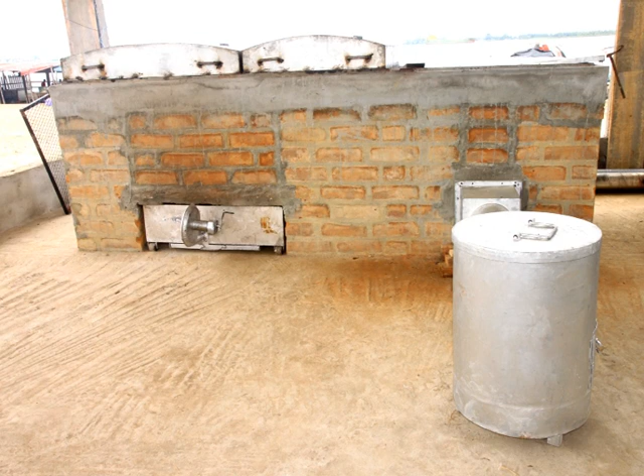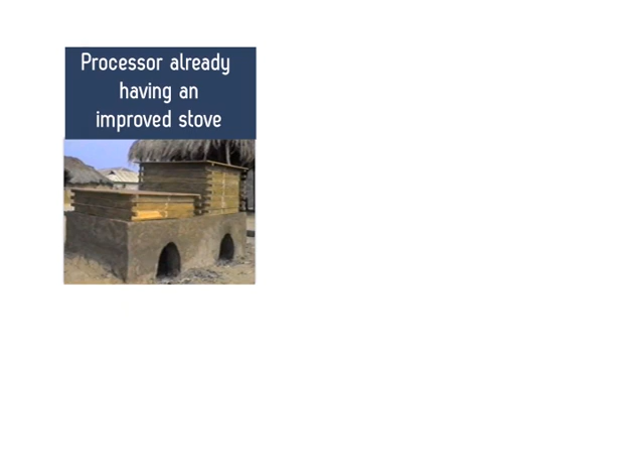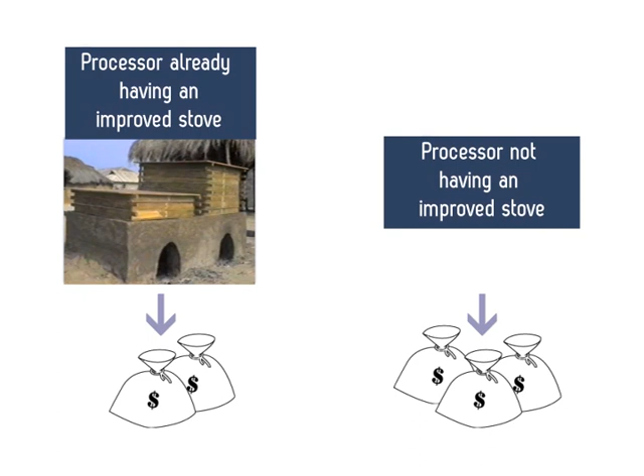The FTT-Thiaroye devices needed by an operator will depend on whether he or she wants to smoke, dry, or practice both, and also on whether or not he or she already has an improved stove on which the FTT-Thiaroye parts will be fitted. Therefore, the resources required will differ from one case to another, with the final objective of benefiting from better work conditions, placing on the market better quality products, and the possibility of additional revenue through the use of byproducts.

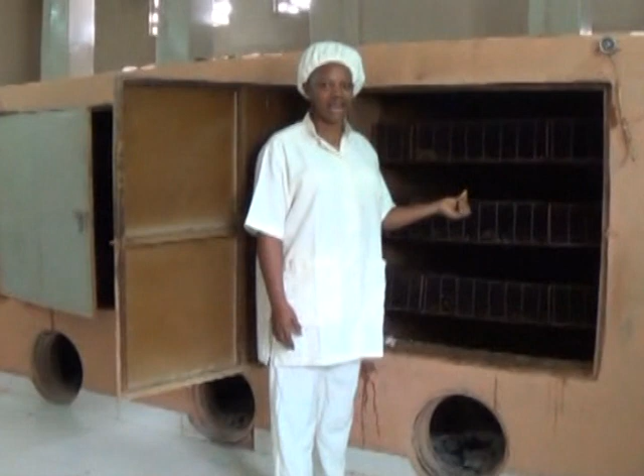In any case, the FTT-Thiaroye equipment must be seen within a framework of a compliant processing unit or plant, which implies an adequate engineering and technical design of the facilities to harbor the equipment.

The frame, racks, and lids are the same for the 2 types of equipment, be it the FTT-Thiaroye or existing improved kilns. This video will not describe how to make these parts given the number of training materials produced in the last decades by development agencies, including FAO, on the chorkor kiln and on the double compartment cinder block kiln made from brick cement, clay, or handled mud.

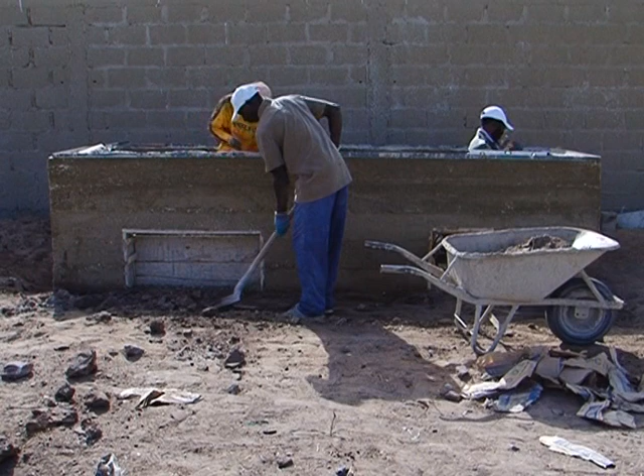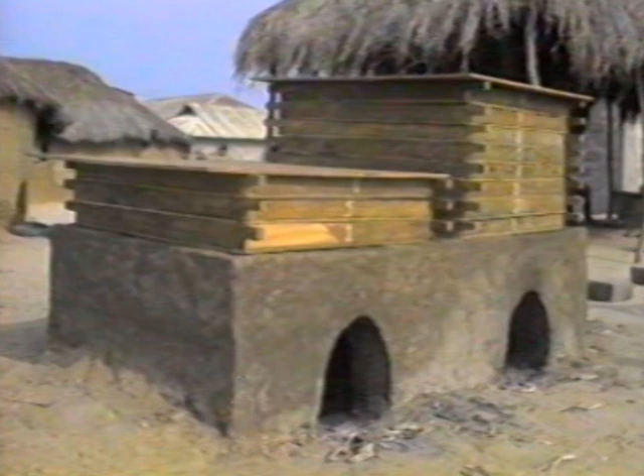However, a detailed description will be made of the vibrated kiln as it has a longer lifetime and requires less maintenance. Building the vibrated kiln. The decision as to what type of vibrated kiln will be used, whether a chorkor, cinder block, or double compartment Altona, will depend on usage practices and social acceptance.

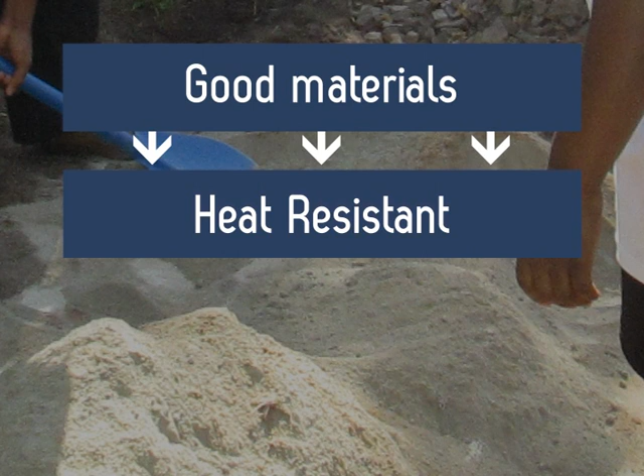As when building any kiln, a suitable, well-leveled plot of land is required with a minimum size of at least 5 square meters. It should not be prone to flooding and any source of contamination and pollution. Good materials should be chosen in order to be very resistant to heat. For example, we recommend well-vibrated reinforced concrete with a high concentration of cement. Ideally, the walls will be made very compact by using the appropriate machine.

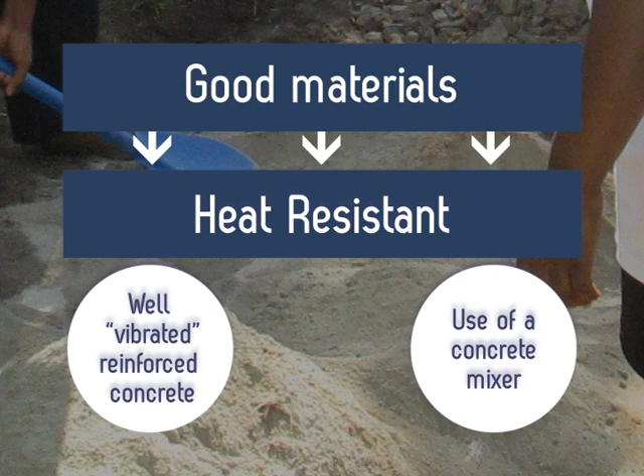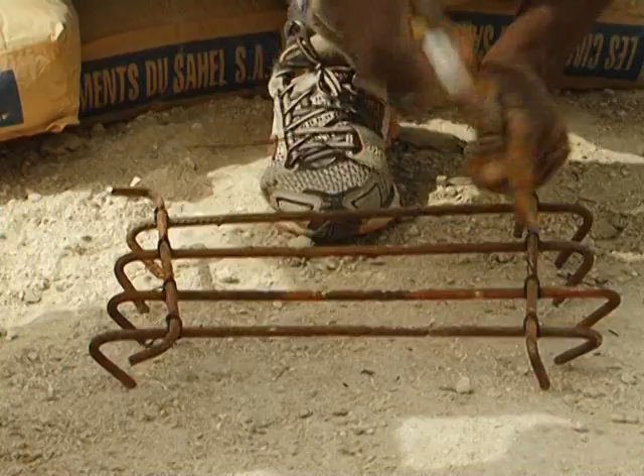Building stages for the double compartment vibrated kiln are as follows. Dig a 20 cm trench and case it with wooden planks. Then position iron bars inside the trench. Cast the foundation with a mixture of 2 cement bags, 2 wheelbarrows of sand, and 2 wheelbarrows of gravel. After a day, the foundation is stripped from its casing.

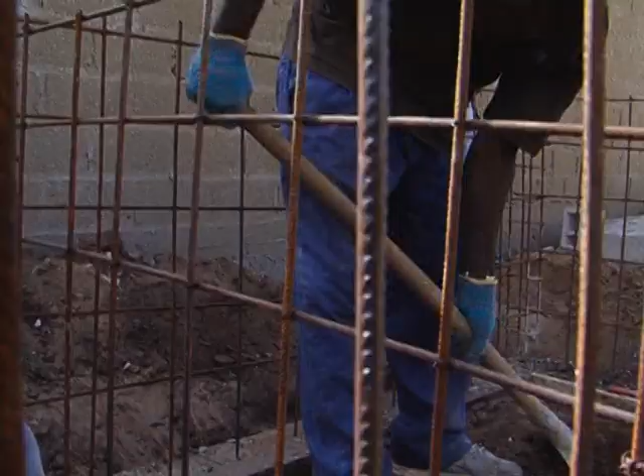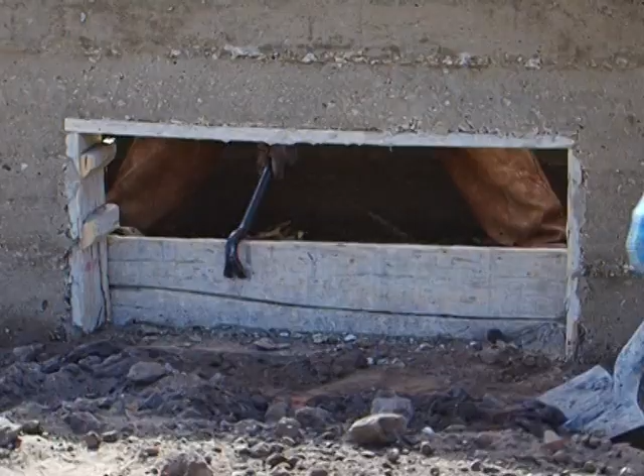The set of walls and the compartment's partition are cased and covered with iron of 6 mm diameter and cast with cement, sand, gravel mixture. The lintel at the gates and the chaining to the upper part are well evidenced. A 7 cm output ledge coming from the walls is cast at 20 cm from the chaining of the upper part.

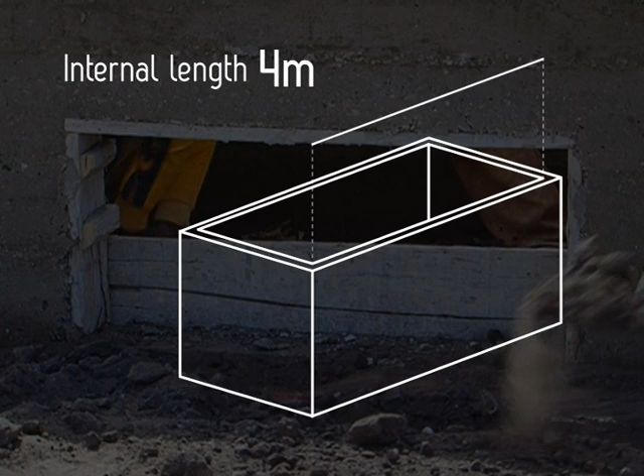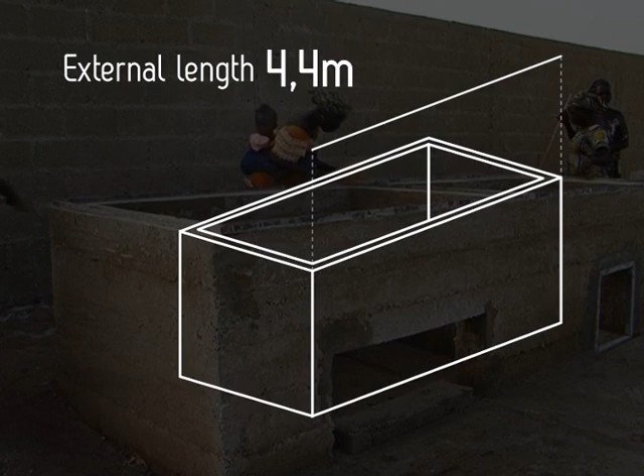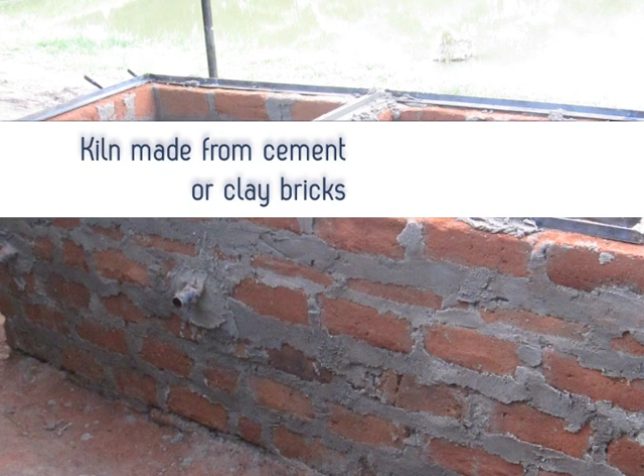For the prototype, the dimensions used were 1 meter for the height, 4 meters for the internal length, and 1 meter for the internal width. As for the external length and width, they are respectively 4.4 meters and 1.4 meters. The double compartment vibrated kiln cost about $800 with an estimated lifetime of at least 15 to 20 years. A kiln made from cement or clay bricks costs about $600 and has a lifespan of about 10 years.

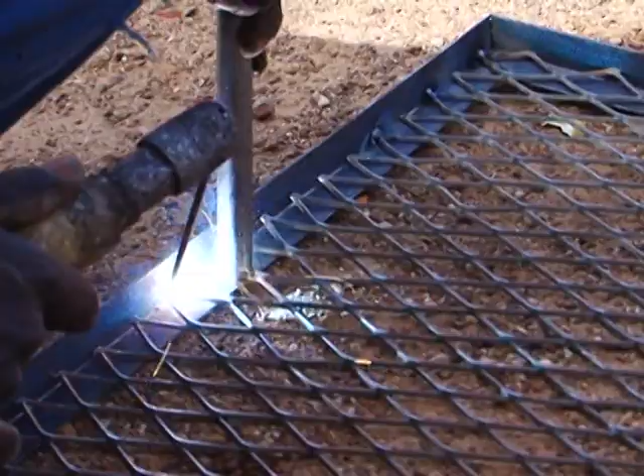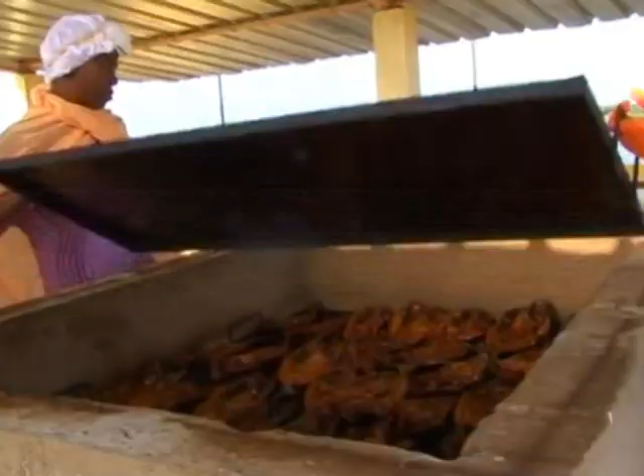Smoking or drying racks. As noted previously, their design is common to those of existing kilns. However, it is worth mentioning that materials should be chosen carefully for easy cleaning and heat resistance. The maximum load per rack for the cinder block is 100 kg against 20 kg for the chorkor. Practical advice would be not to exceed 10 stacked racks.

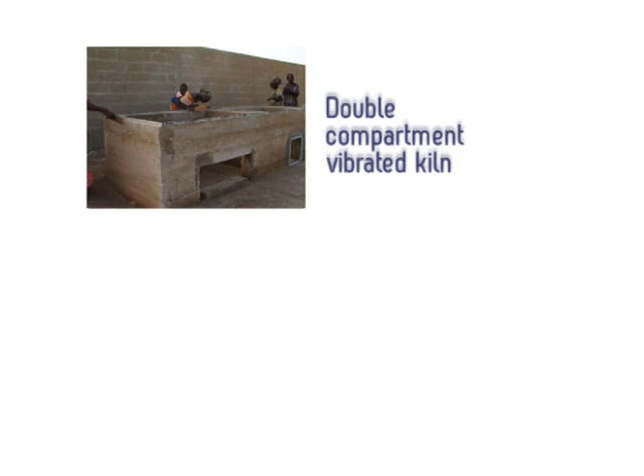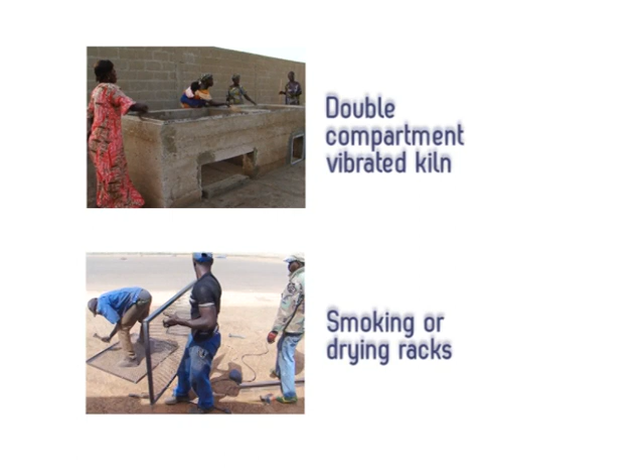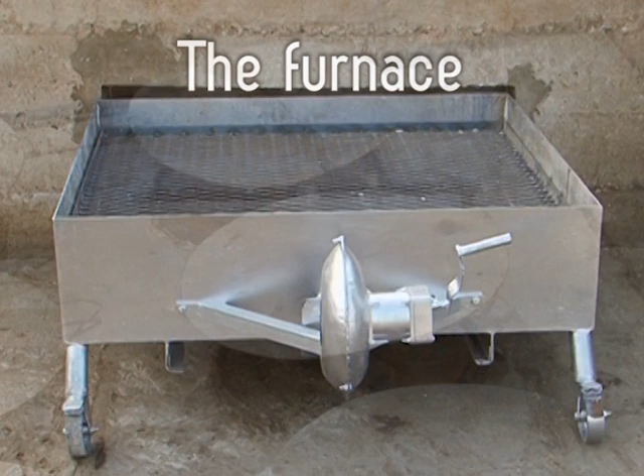The processor who has this equipment, kiln plus racks, will then need to get the relevant accessories to benefit from all the functions the FTT-Thiaroye offers. Accessories specific to the FTT-Thiaroye. First accessory, the furnace. Second accessory, the fat collection tray. Third accessory, the external smoke generator.

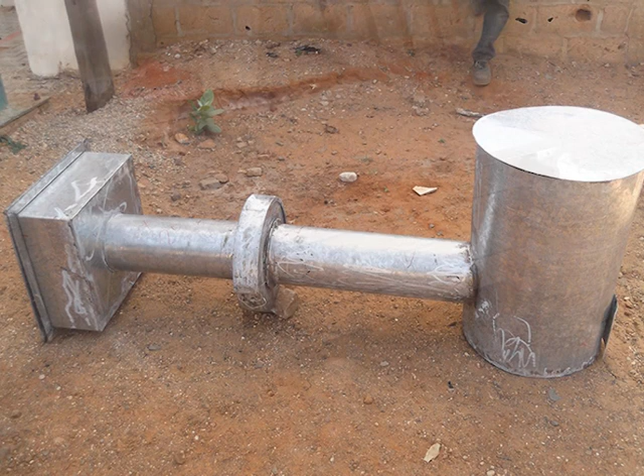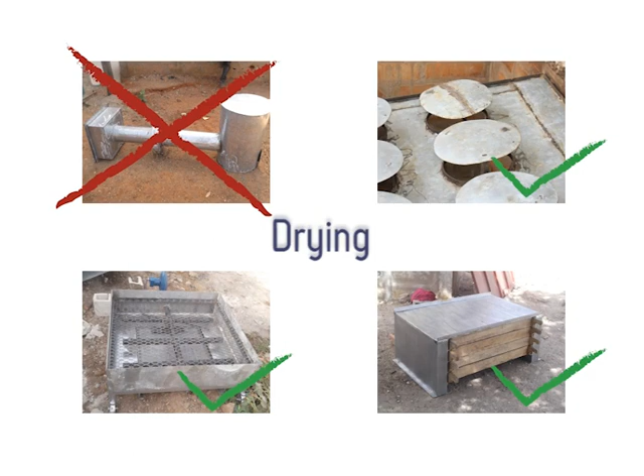Fourth accessory, the hot air distributor. For drying and storage of dried or smoked fish, the same accessories as those described above will be needed, without an external smoke generator. Apart from the kiln frame, all of the FTT-Thiaroye equipment, which is mostly made of steel, can be made by blacksmiths or any metal worker.

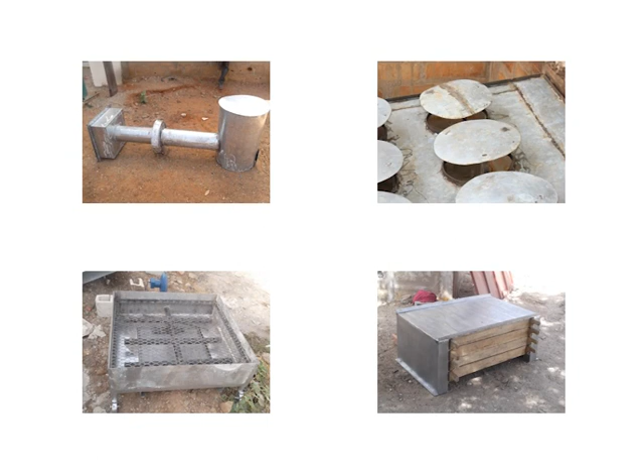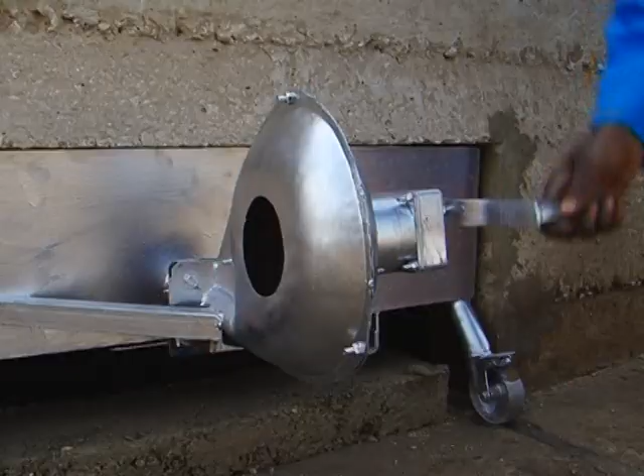Reviewing in detail the description and manufacturing of each of these FTT-Thiaroye accessories. First, the ember furnace. It will hold the fuel used to cook the fish. Loading it in the fireplace concentrates the heat on the product instead of having external leakages that might otherwise affect the operator during smoking. This feature also reduces fuel consumption.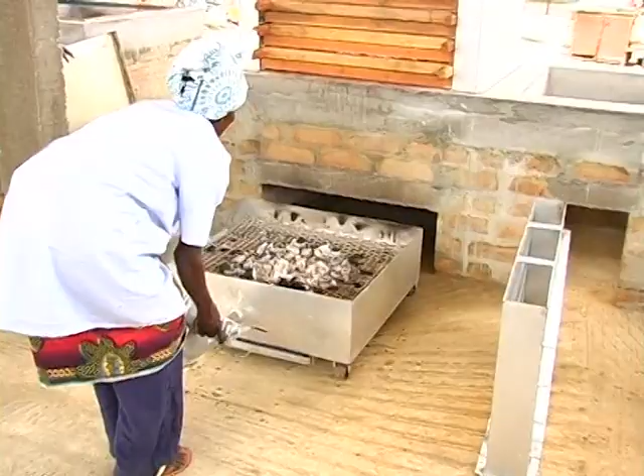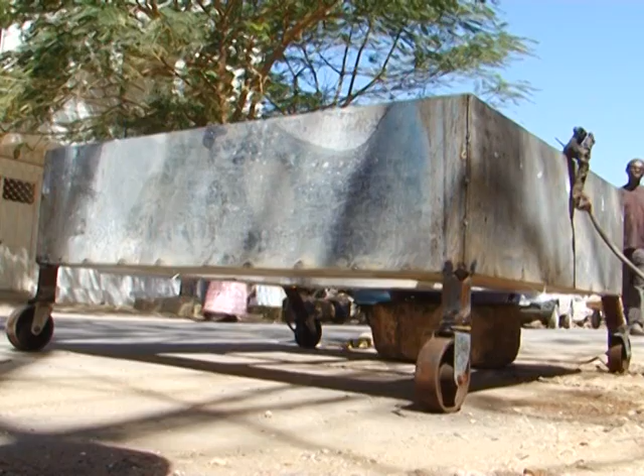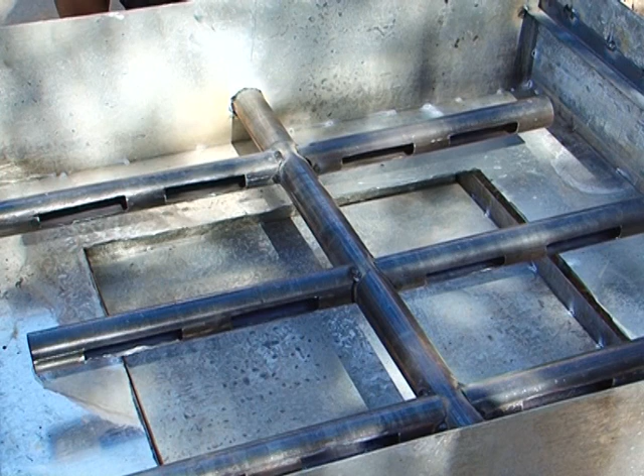The furnace should fit the dimensions of the kiln's gate and consists mainly of a 24 to 26 centimeter high and 1 meter wide metal box. It is equipped with 4 wheels to facilitate its movement towards the opening of the kiln. Cut perforated iron tubes are welded to the casing and serve as ventilation air pipes.

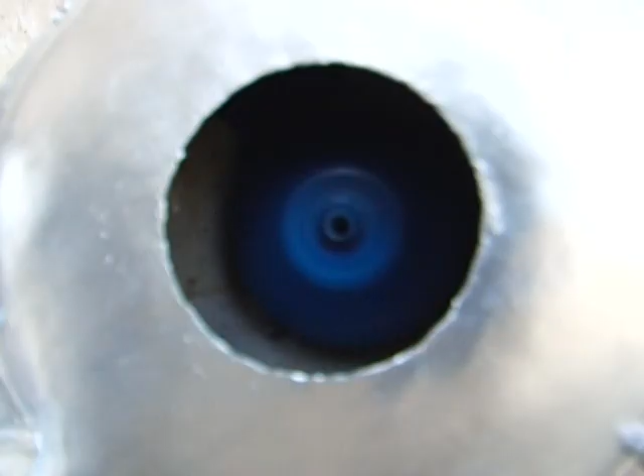A removable ash pan, a wire mesh to carry the embers, a forge to kindle the fire and send the hot air inside the kiln. The furnace costs about $200 with an estimated 5-year lifespan.

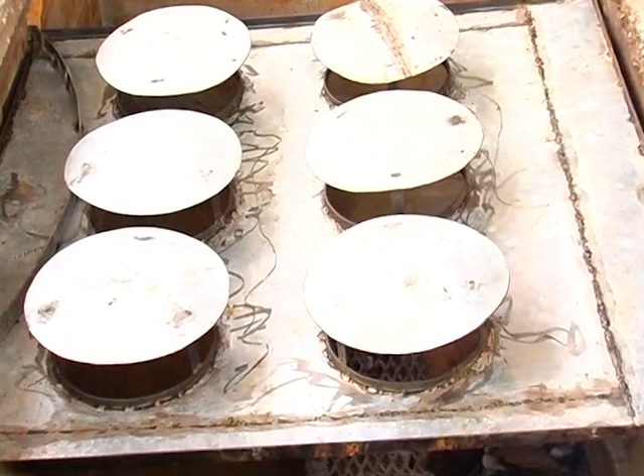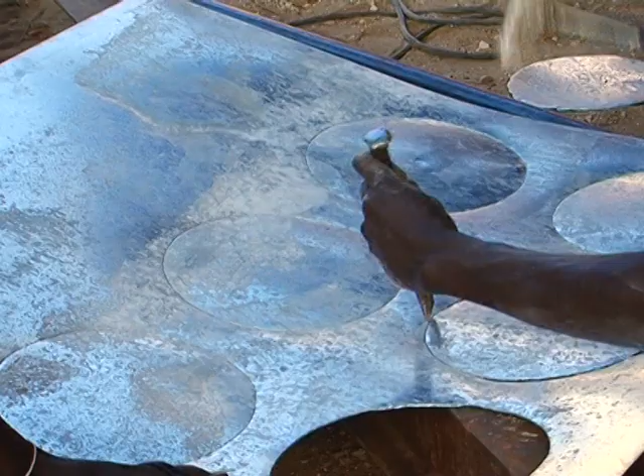The second accessory is the fat collection tray. As its name suggests, this is a system for collecting fat while cooking the fish. It includes a set of holes, each topped with a cone-shaped cap. The holes allow the heat from the stove to reach the fish on the rack, and the cone-shaped cap allows the fat to exudate, to drip on the tray instead of falling into the fire and causing a tar deposit on the product.

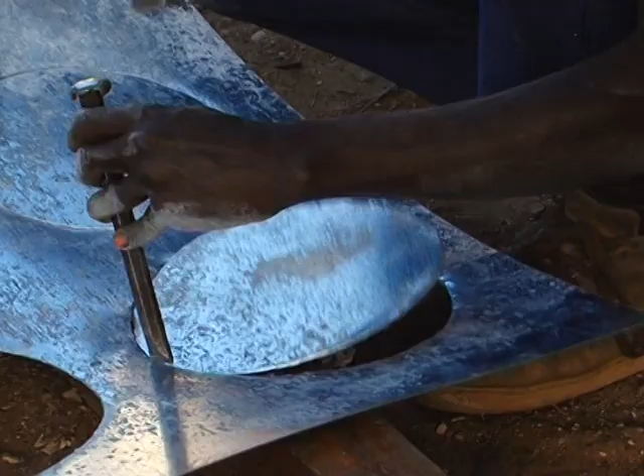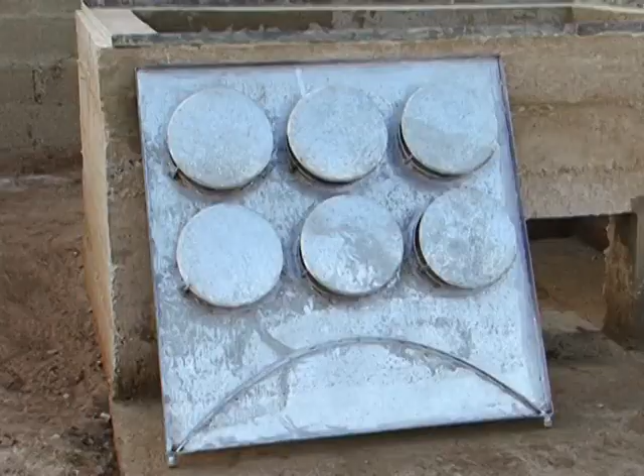The size of the fat collection tray is variable. However, it should fit the furnace in which it should be placed. The one used during the trial was 1 meter long, 1 meter wide, with 10 centimeter wide holes. A short, thin metal rod, topped by a cap, is disposed on the circumference of each hole. The fat collection tray is slightly tilted and placed 5 centimeters below the rack with fish. The average cost to manufacture the grease collection system is $100, with an estimated lifetime of a minimum of 5 years.

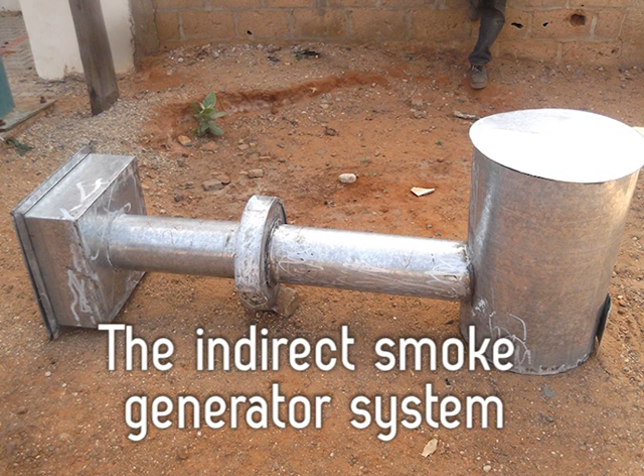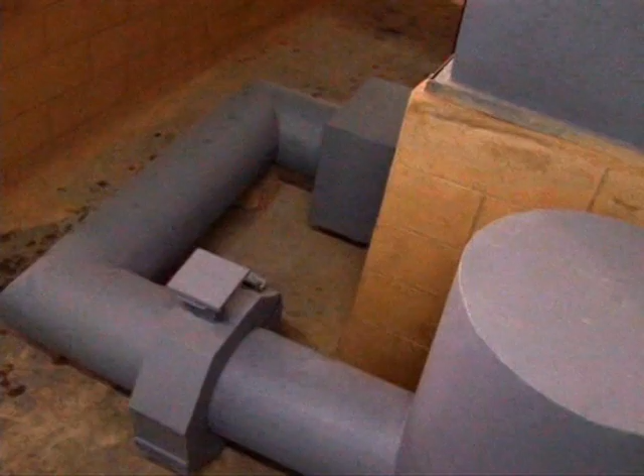The third accessory is the indirect smoke generator system. It is made up of a metal barrel fused to a metal tube that is roughly 1.5 meters long and 30 centimeters in diameter. The metal tube can be shaped into a spiral or into a circular tube depending on the available space. There also is a housing for the filter. This external generator can also be made from a water tank that is no longer used.

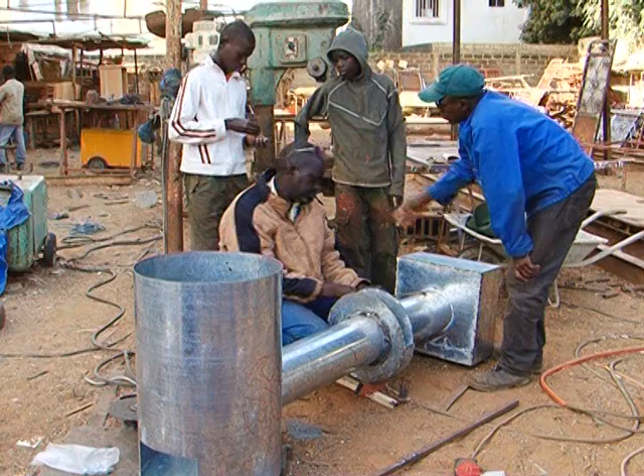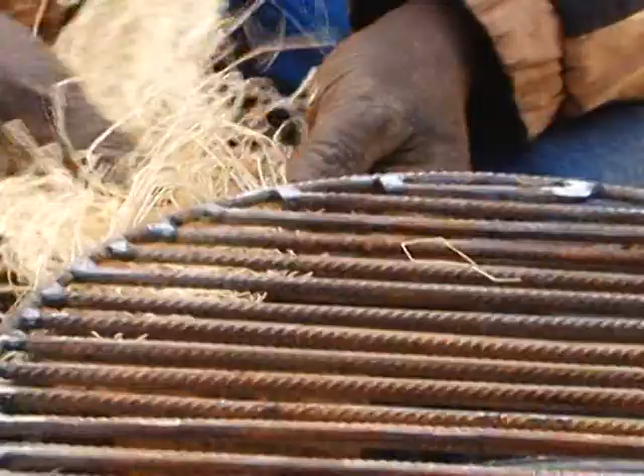The housing for the filter is manufactured with a metal sheet. It is circular and must fit perfectly in the middle of the tube. The carpenter also manufactures the casing with 6 centimeter wide iron. A vegetable sponge used as the filter is placed inside the casing. This is a fine mesh food-grade sponge. The casing containing the filter will be placed in the metal housing.

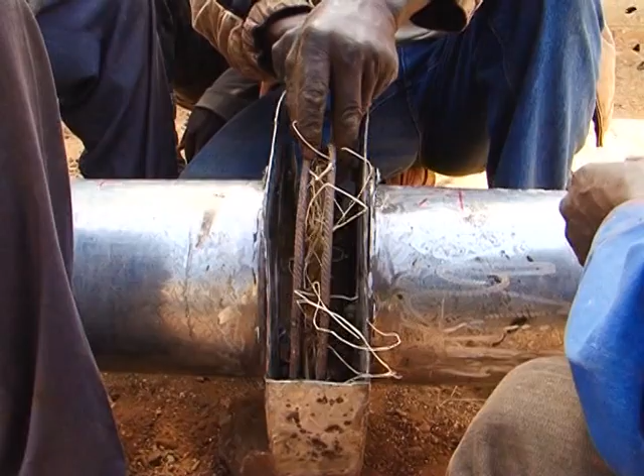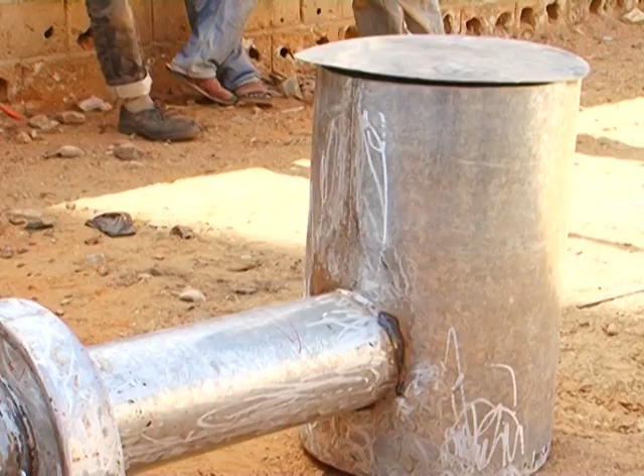The fact that it is placed outside the smoking chamber allows the smoke to cool down before it reaches the product, while the smoke decantation effect is produced by the filter inserted in the casing. The average cost to produce an indirect smoke generator is $260, with an estimated lifetime of a minimum of 5 years.

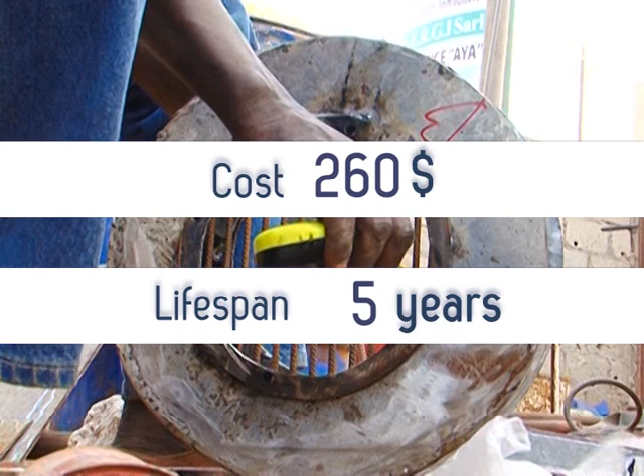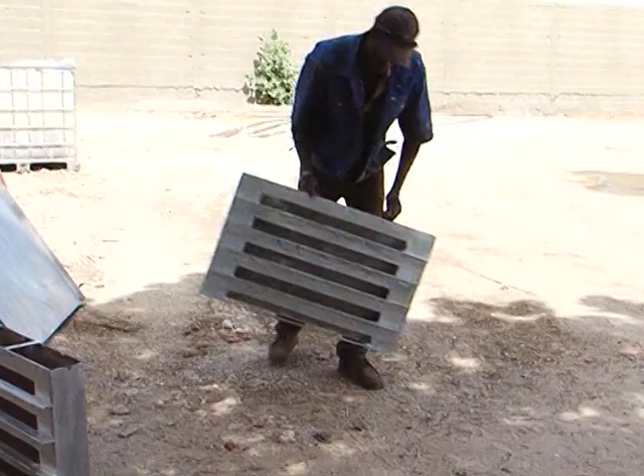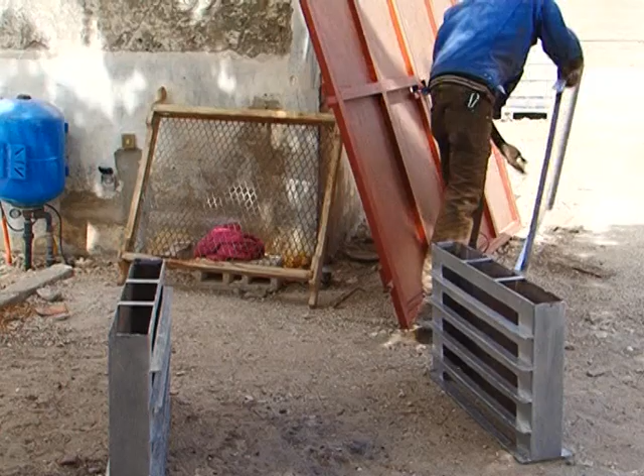The final accessory to purchase is the hot air distributor. It is particularly useful when using multiple racks. This system is composed of 2 metal boxes. Inside each of these, horizontal fins match the number of drying racks and perfectly fit them. The drying racks are stacked and arranged vertically. A metal pipe connects the furnace to the air distribution box to facilitate the air distribution. The hot air can thus circulate on the racks using the furnace's force.

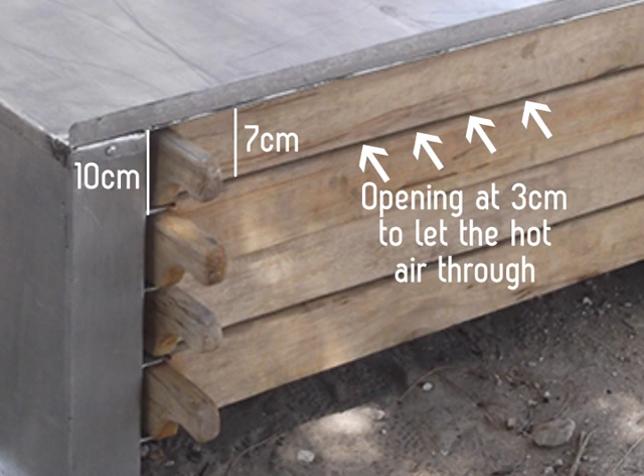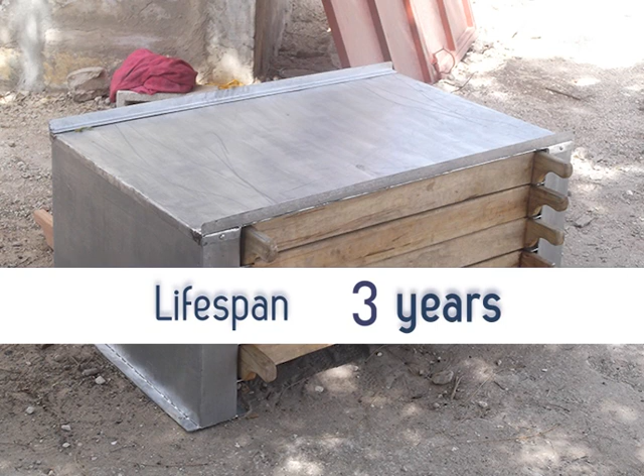The height of the aerated rack plank goes from 7 to 10 cm, and a longitudinal opening is made at a level of 3 cm to let the hot air through during drying. The air distributor has an estimated lifespan of at least 3 years and costs an average of $95.

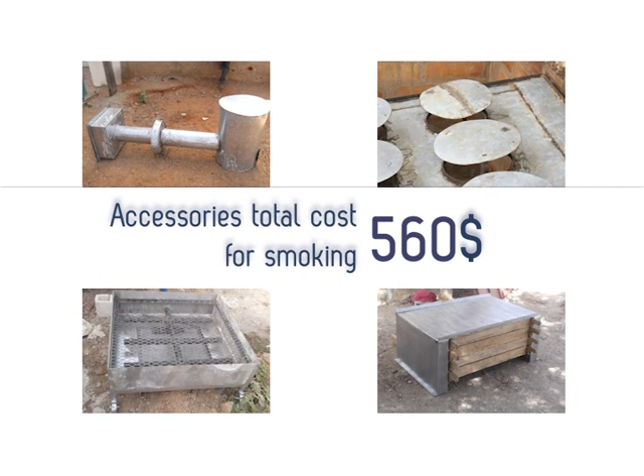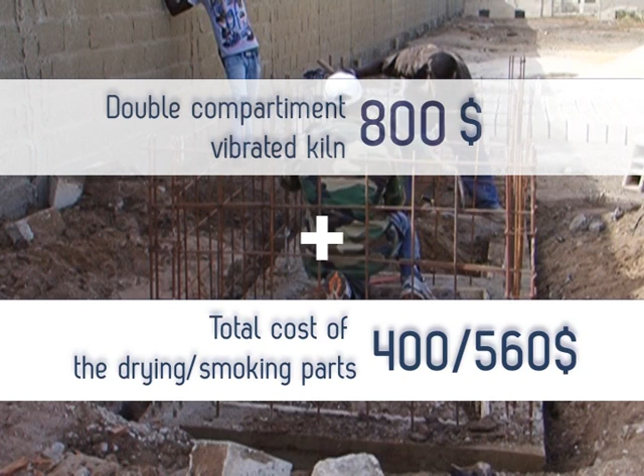Overall, in terms of costs, the FTT-Thiaroye accessories are estimated at $560 for the furnace, fat collector, smoke generator, air distributor set for smoking, and $400 for the same set without the generator for drying. If you would also like to build a vibrated kiln, you need to plan $800 for the kiln, besides $400 to $560 for the FTT-Thiaroye components.

All these elements can be built locally and customized depending on the amount of fish and/or shellfish to dry and/or smoke per day. The next video will show us how to use this highly effective system for drying and/or smoking fish products in a uniform, rapid, and healthy way.